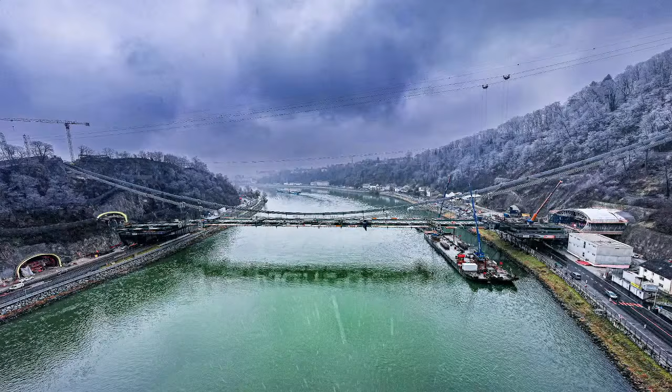Sometimes it's not the material of the structure itself, but the material you build in. Here, this is a bridge we have just recently finished in Austria, crossing the Danube River, where the foundations were the problem, the rock was the problem. Here, actually, it was not a problem. We could finally do a bridge we have always wanted to do, a suspension bridge without masts, where the cables are directly anchored into the mountains. That you can only do if the material of the foundations is good, if you can anchor heavy loads in the soil. Or this is a design for a beautiful, transparent, lightweight arch bridge in Switzerland.

And Switzerland is concrete country, but this is a steel bridge. So sometimes you can switch even customs and traditions if you come up with a convincing design. And here, in this case, steel was the better solution. It's in the city of Chur, and in September there will be an international footbridge conference there in this city.

And here, perhaps you know where this is. That's Tirumala. About 9 years ago, I was at IIT Madras, gave a course with Professor Devdas Menon. I think it was in 2016, and we did a workshop on bridge design with the students. So the idea was to design a footbridge for Tirumala, and later we made a concept study for a bridge to protect the pedestrians because they had to walk on the road. I'm not sure what happened to this bridge. Let's talk about this later.

Anyways, just to give you some ideas, but our real roots, one of the roots of our office, is actually in India. Perhaps you know this bridge. I've been talking about this sometimes. This is the second Hooghly Bridge in Kolkata, the Vidyasagar Setu, that was designed in the 80s, and at that time it was the longest cable-stayed bridge in the world.

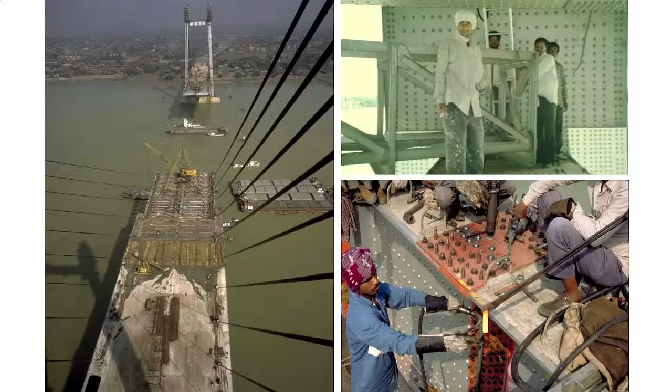It took a long time to build it. By the time it was built, it was not the longest anymore, but it was the first cable-stayed bridge with a composite deck. And it showed the power of composite sections, and it was built with local material, indigenously, because at that time there was not really weldable steel in Kolkata. There was not a lot of experience with high-strength friction grip bolts, but yes, there was experience with riveting. So the entire bridge was built. It's a world record long-span composite deck cable-stayed bridge, and all riveted. So this is possible with local people, local workforce, local material, and local construction methods.

Is there a pointer here? I don't know how the pointer works here. But anyways, you can see it. No, I wanted the pointer, that I can. No, don't worry. Let me go back. Here we were.

Anyway, so this is local materials and riveting. So I think we as engineers have to be flexible and find out what is available and what can be done. And riveting is actually a very good way of connecting steel, even though today it's perhaps too expensive. So the bridge is still standing, and it shows how slender cable-stayed bridges can be, how resource saving they can be. It's a 450-meter deck with only a 1.50 meter height.

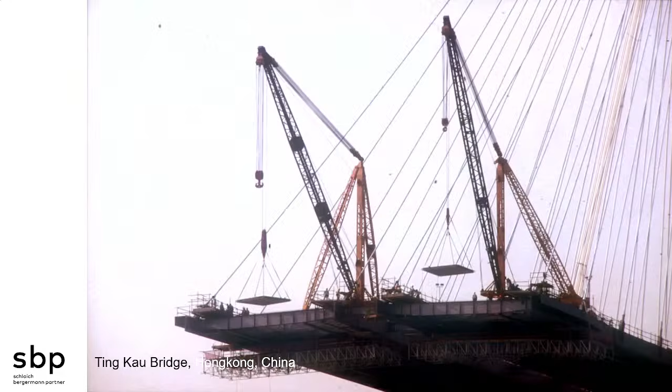This bridge again is done with the composite deck. It's one of the few multi-span cable-stayed bridges, with a 450 meter span and about 1.50 meter deck height. The difference to the bridge we have seen before is that here we have worked with precast concrete slabs. You see a steel grid, and on the steel grid there's a concrete slab. I think this is a very fast way of building such bridges, because the steel grids are comparatively light. They can be prefabricated and put on site very quickly.

Then you have the sheltering concrete slab that protects the steelwork and takes the horizontal cable forces very nicely. But if you work with in situ concrete, these horizontal cable forces on the young concrete cause a lot of creep, and this creep overloads the steel very easily. So for the next bridge we chose prefabricated concrete panels, because they're older, so there's less creep and less loading on the steel.

So this is the example of the Hong Kong bridge, the Ting Kau Bridge, and because it's a multi-span bridge, you can see you have to stabilize the main pylon. Therefore there are these longitudinal stabilizing cables, because the central mast has no backstays, and usually cable-stayed bridges do have these backstays and they need them.

Then this story continues. We came back to India. Perhaps you know this bridge, the Signature Bridge in New Delhi, which is a signature bridge because at the time the chief minister, Mrs. Sheila Dikshit, wanted an icon, a signature bridge. When I hear this word, I get goosebumps, because usually I'm trained to do good bridges, not to do crazy stuff, and signature always sounds a bit like crazy stuff.

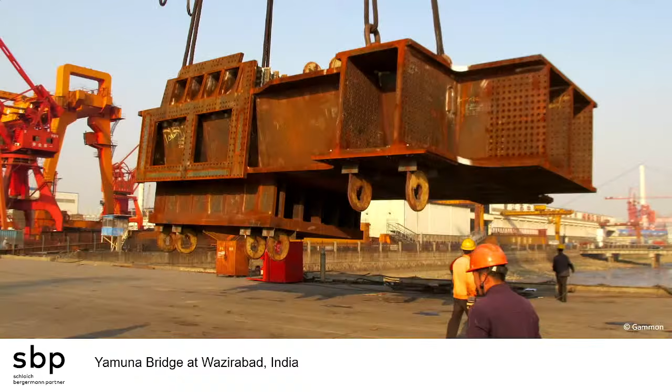I'll give you one example of what that means. If we look at just the connection where the mast meets the deck, this is a rather big element that needed to be prefabricated, meaning you have to move 400 tons of steel half around the globe. This was prefabricated around Shanghai, plates welded together, and then you see the little holes bolted to longitudinal and transverse girders. It had to be coated, and they had to bring it all the way from Shanghai to New Delhi.

And you see this plate here, a 250 millimeter plate. We thought that was not possible. We had designed it with lots of 50 millimeter plates, but the Chinese said no problem, we can weld 250 millimeter steel plates. So the choice of material has also got to do with the dimension of the materials.

What can you actually do? What can you weld? What can you connect? What can you transport? This is just this little piece here, and the entire bridge was then built together like that. Because think, if you see such a mast, such a pylon, how would you construct it? What's the structural detail behind it? Is this hollow with load-bearing outer walls, or is there a structure inside? If you look at the Statue of Liberty, that was actually designed by Eiffel, of the Eiffel Tower.

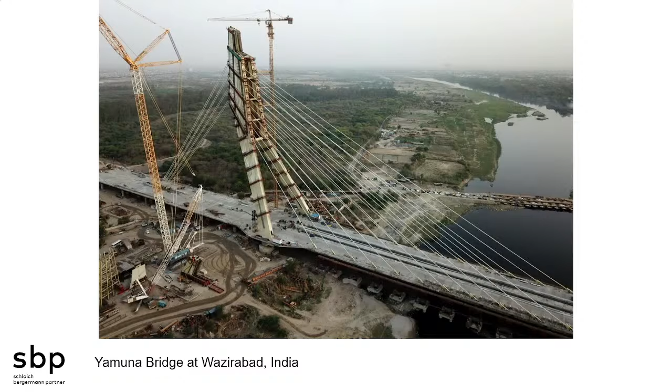And then you see these horizontal lines, or almost horizontal lines. This is where individual elements were connected. It's basically a big Lego thing. Large elements were bolted together. You see the last one on top. So this would be the size of one of these elements.

So the bridge is standing nicely, fulfilling its task as far as traffic goes. But it's a bit strange, why have a 250 meter single-pylon cable-stayed bridge in an area where there's no water really? Because this is basically a 500 meter bridge if it had two masts. The initial idea was that all this would somehow be dammed, that there was a huge lake, and that would become a big park with a lake. So they call it the signature bridge, and whenever I'm in New Delhi I say, yes, but the signature was the promise to make a park, and you have not really fulfilled your promise yet, because this bridge only makes sense if there's a lake and a big park. I really hope that one day this bridge will get its lake and make sense.

But it's a nice composite deck, and it really relieves traffic in New Delhi. Not all bridges need to be composite decks, obviously.

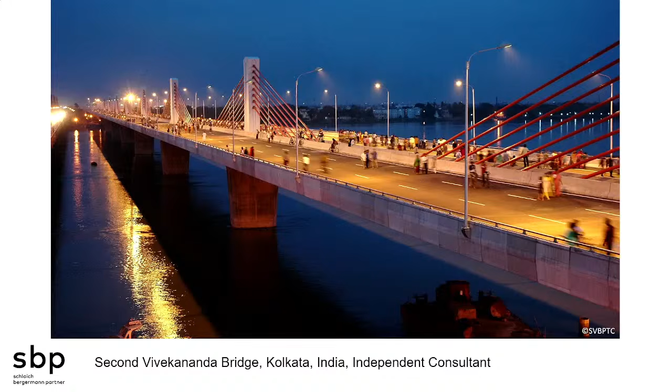And here, this is an example of an all-concrete bridge, the multi-span extradosed bridge, the second Vivekananda bridge in Kolkata, designed by Parsons and IBT, together with CES, built by L&T, all these abbreviations.

I found it very interesting to understand how extradosed bridges work, because I come from the field of cable-stayed bridges, and if you see such a bridge as a cable-stayed guy, you say that makes no sense at all. These very low pylons, these very inclined cables, the forces in the cables are way too high. Why make such a high deck if you could make it as slender as we've seen before? The backstays are missing, this is all crazy, it makes no sense.

But they are not cable-stayed bridges, and this is why they do make sense for spans between, say, 100 and 200 meters. Basically they are only box girder bridges where the pre-tensioning or post-tensioning has somehow grown out at the supports. And since the cables are very shallow and the masts very low, they work mainly to carry dead load. Also, because there's no backstays, the masts are comparatively flexible, and since the deck is very heavy, the deck is basically taking all the live load.

So these cables you see are mainly for dead load, basically nothing but post-tensioning, so the load-bearing behavior is completely different. Since they are mainly for dead load and don't get big stress changes because of live load, there's less fatigue problems. And if there's less fatigue, you can use cheaper steel and cheaper anchorages. Therefore extradosed bridges are very attractive, very economic for smaller spans.

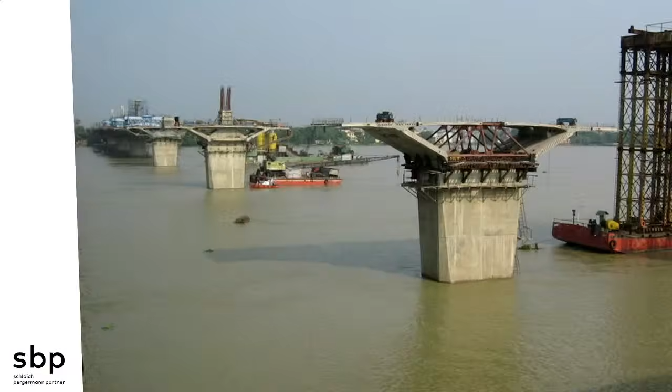So this is what I learned on site. We were the independent consultants, and I learned so much about extradosed bridges, especially in India with all these well foundations. Well foundations are another very Indian thing. You have these big rivers, the scour and the sand, and that all calls for these well and caisson foundations that you wouldn't use so often in other parts of the world.

So the well foundations cannot be seen, they are down here, up to 50 meters. Then you have this concrete pier, and you see the first segment still in steel, again composite, steel and concrete. And then back there you see it's all cast with concrete, all monolithic. So this is already an example of an integral bridge without bearings and joints, at least at the piers.

And this is one of the segments, D6 segments, D6 because it's 6 lanes. There's all kinds of shear keys to connect the deck segments. Here you see this hole where the cables are installed.

So very typical, and something that you would not build in Germany, for example. In Germany, such bridges are not allowed because in Germany people say in these joints there's trouble. We have a lot of de-icing salt in Germany, and the salt water runs into the joints, and then you get corrosion in the pre-stressing. So in Germany it would be very hard to build such a bridge, while in other parts of the world you see them all the time.

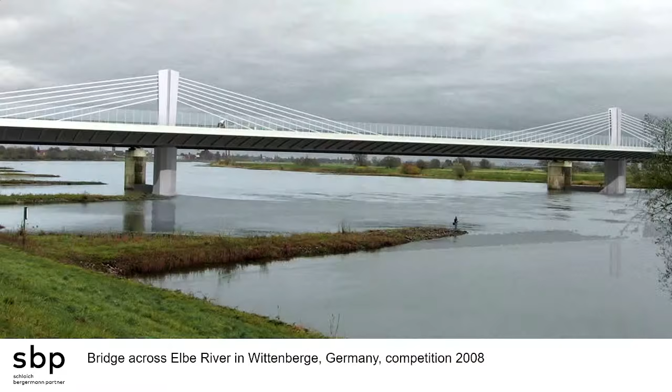Extradosed bridges are also something quite Indian. There's a lot of extradosed bridges here in India, while in Germany there's not so many yet. This was one proposal that we did for a German Autobahn highway, but did not get built. Still, we got all the extradosed guys in the world, the ones that I know at least together. There's Mr. Sankaralingam, whom you perhaps know from L&T, and at IABSE we wrote one of these IABSE books on extradosed bridges.

So we collected all the knowledge, that international knowledge that is available in this book. Thank you very much.

So we have talked about cable stayed bridges and extradosed bridges and a little bit about the differences, but this doesn't necessarily have to be a steel cable. It can also be a steel plate. So this is a railway bridge in Stuttgart, Germany, that follows the same principle. You can call it an extradosed bridge, but rather than having expensive cables, it's just heavy steel plates that at the same time form a bit of acoustic protection.

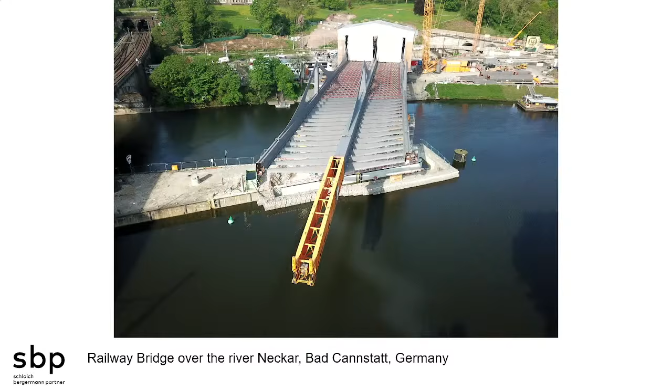And this bridge was just recently finished. It's again a composite deck. You see the tent back there. This is where the deck was prepared, pre-welded, and then it was pushed segment-wise across the river. And you see the longitudinal girders and the cross girders. And then the concrete was cast on top.

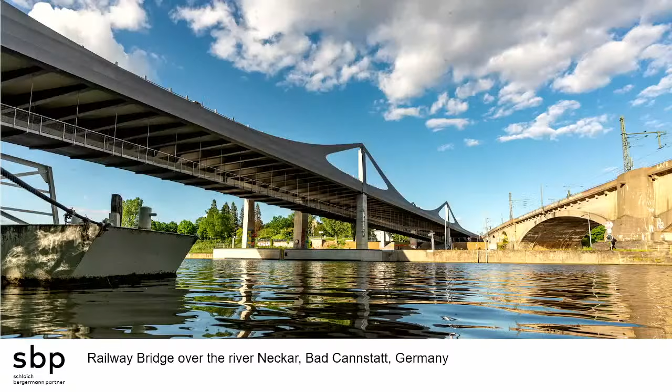So even railroad bridges can be done this way. And underneath the deck, you see this hanging footbridge. So at the same time, it is kind of a protective structure, protecting the pedestrians that at the same time cross the river Neckar in Germany.

This was the first part. How much time do I have left? You have about 10 minutes. 10 minutes, okay, then I have to speed up a little bit.

So integral bridges. In Germany, usually you do bridges with lots of joints and lots of bearings, and already my father, whom you have met in the beginning, said, look, why not make integral bridges with very slender decks and very small spans. The smaller the span, the lower the loads. You can do it with very slender piers. And this is what we have actually designed for German railways.

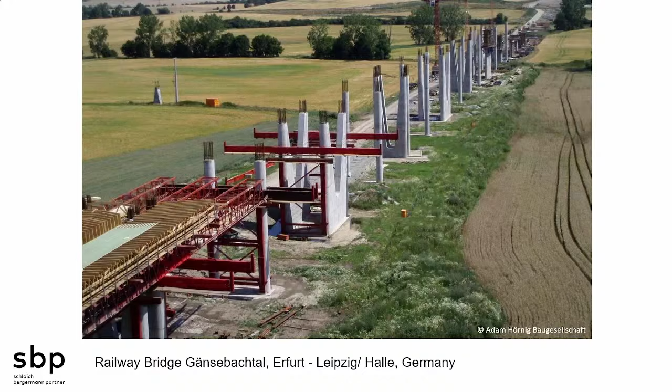German railways is rather conservative, but they have accepted integral bridges. So here you see very slender piers, very slender support structures with the starter reinforcement, and everything was concreted together as an integral bridge. So no bearings, no joints, or very few joints, and that is, I think, a very elegant way of building robust and low maintenance bridges all over the world.

But if you define well the concrete, and in this case you have to define not only the strength but really the modulus of elasticity, then you can do very lightweight, very elegant, very resource efficient structures that last for a long time.

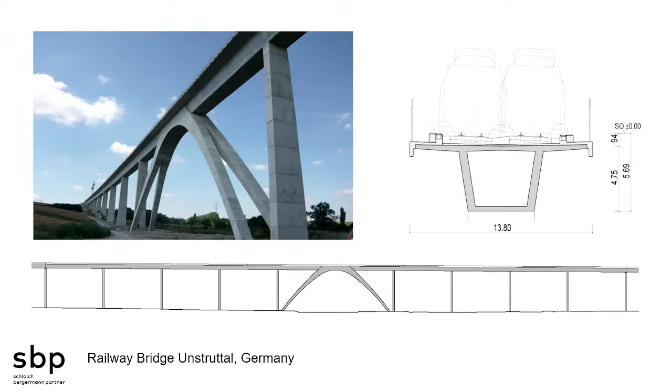But in this case, yes, the movement goes all the way into the ground, so you have to also do pile-soil interaction. Calculation becomes very important. And this is also my claim: you have to spend a lot of brain as engineer, and the contractor and the client are the ones who save money, so they should pay us well. If you don't pay your engineer good fees, he has no time to do stuff like that. So I think it's very important that contractors and clients understand that.

So this is the bridge, and you see even at the joint, there is no bearings, because there's two walls on the mast, on the pier, and these walls are monolithically connected to the deck.

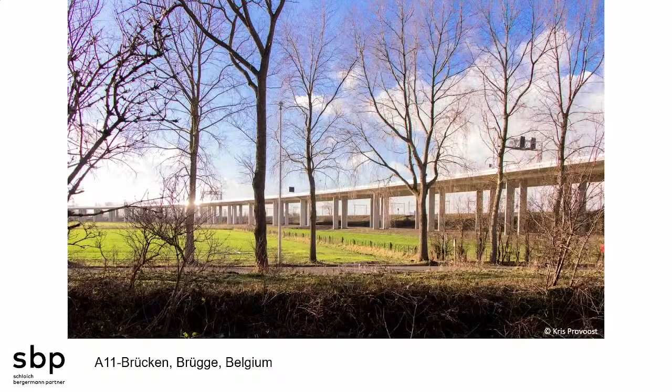We applied the same system to highway bridges, and you can see that it's a very humble highway bridge, but still small spans, only 1.20 meters height, and very slender piers of high strength concrete that can take care of all the movement. So this is a 600 to 700 meter integral bridge without any bearings, any joints, and they are very cost efficient, because there's no expensive bearings and no expensive joints.

But yes, you have to sometimes construct the piers and stress them to the side, then cast the concrete, and then with time they go straight due to creep and shrinkage. You have to do some fancy construction acrobatics sometimes if you really want to do it successfully. So you see how slender these piers are for a rather normal bridge, but the contractor saved a lot of money and the world saved a lot of resources.

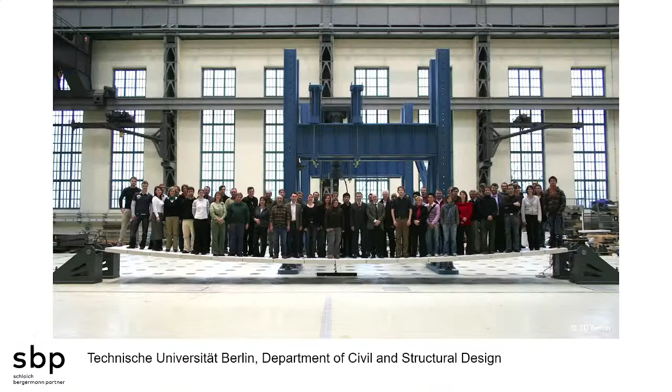So I have about 5 minutes left.

Okay, now we go into the field of carbon fiber. Perhaps we can discuss this later, because these bridges are pre-stressed with steel, and we have started to work with carbon fiber. This is perhaps the first carbon fiber stress-ribbon bridge in the world, about 15-meter cable, stress-ribbon bridge with only 1 millimeter structural height. Very slender, because carbon fiber does not corrode, no fatigue, and very lightweight.

So I had several PhD students working in the field of carbon fiber cables. We have developed anchorages for carbon fibers. I could talk for hours, but this is not the time right now. I just tell you, don't break them. Make sure that this brittle material doesn't break, because you end up with a lot of fibers and a lot of powder, black powder, after a big bang.

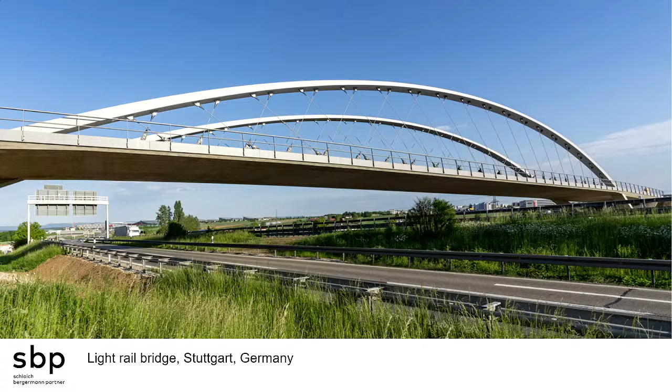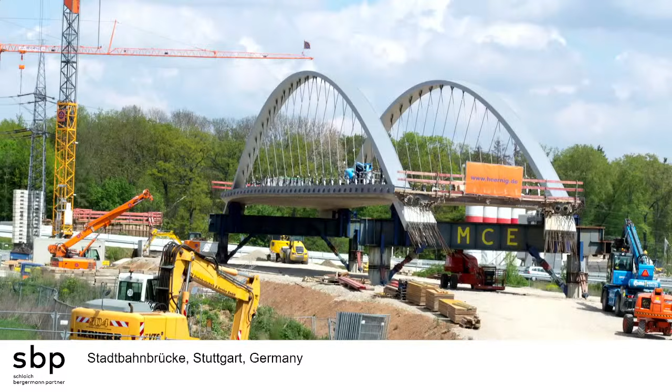But this research has led to bridges like that. This is a network arch bridge where you get a lot of stress changes due to live load, and if you would make the hangers in steel, they would have big diameters because of fatigue design, while with carbon fiber you can end up with very slender hangers, as you can see here. The entire bridge was prefabricated. This is the carbon fiber anchorages, and here you can see how slender these hangers are in carbon fiber.

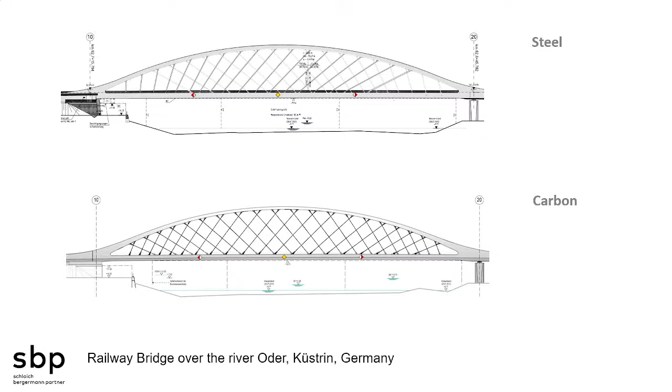There's another bridge I quickly want to show you. This is the Oder, a river between Germany and Poland, and German railways again allowed the change from the heavy steel hangers to the lightweight carbon fiber hangers because it meant lots of savings for them. So this is another railway bridge where the bridge is pushed in and eventually goes 120 meters across this river. You see how slender the hangers are.

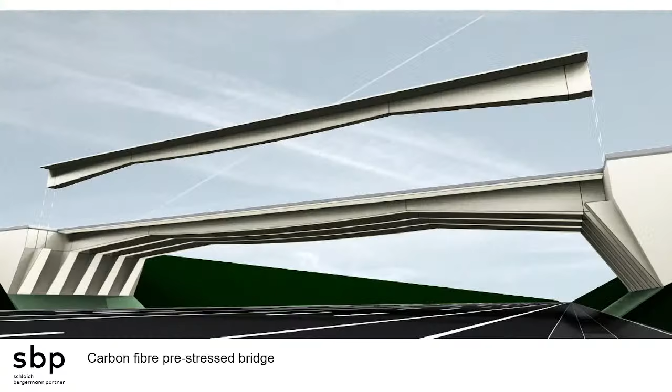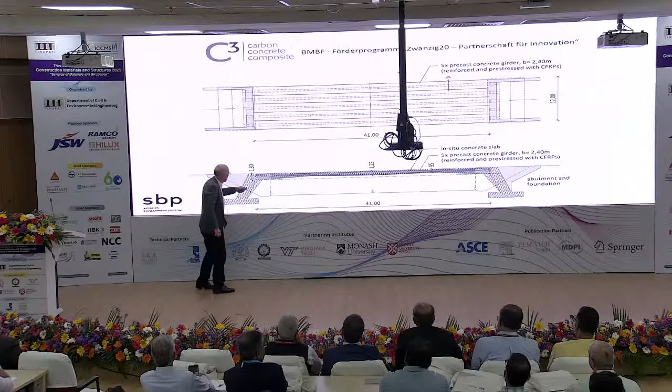We have developed now pre-stressing systems for concrete girders. So we want to do bridges that consist of individual carbon fiber pre-stressed girders that are cast into the abutment. And we have done tests now. This is a 1:2 scaled example of such a precast girder cast into the abutment. So you have no joints, no bearings. You end up with an integral bridge.

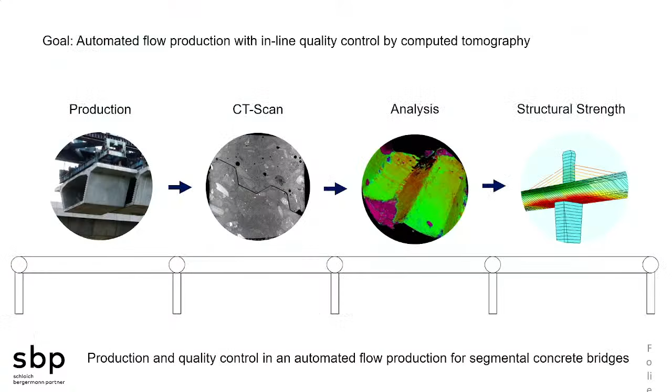And we have loaded it very heavily, as you can see here. Then with a shaker on top, we did 2 million cycles, and we found out there is no fatigue issues in carbon fiber. And we are now trying to do this with small elements. We do computer tomography to see what the joints say to that. If you do computer tomography, you see all the little cracks in the concrete. We can check the surface and how the surfaces are connected.

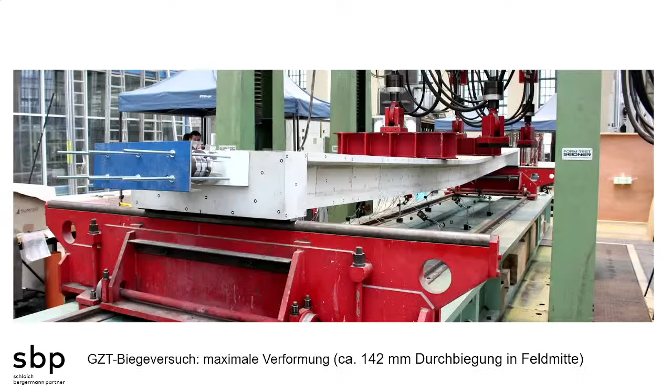And we've actually built a small test bridge. You see these small precast elements, and they're stressed together with carbon fiber. We could prove that these carbon fiber pre-stressed bridges work very well. You see the carbon fiber strands here, pre-stressed together with lots of little elements.

So this was a quick run through the world of composite decks, integral bridges, carbon fiber, India, Germany. I hope this entertained you a little bit and inspired you to think about materials and structures. Thank you very much.

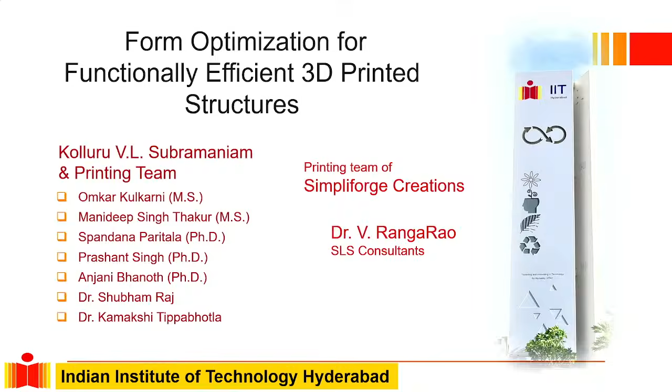With this, I just want to quickly touch upon what 3D concrete printing is and the niche we hope to fill. First thing is, the current form of construction we have is slow, and it by itself requires forming—you need to construct shuttering, assemble it, pour your concrete, and slowly it takes shape. Now, forming on site can be an advantage but it's also a disadvantage because I'm limited to rectilinear shapes, which are not the best or most efficient shapes possible.

What are you doing? You're packing a lot of weight, and to support that weight, you need more weight. So you work down a negative spiral, where if you look at fundamental concepts of design—the way we design a beam, usually rectangular, as we're taught in reinforced concrete—we assess the demand. Usually most of the demand, particularly with larger spans, comes from the self-weight itself. We try to balance it with internal moment of resistance generated by the material, or a combination of materials, steel and concrete.

And if the material resistance is not adequate, what do we do? We make the beam deeper. In doing so, we add more weight, which adds more demand, and we go down a negative spiral. Most of you who have done reinforced concrete design know that beyond a certain span length, you cannot do a singly reinforced concrete beam—you just cannot, because you go down in a negative spiral. It's like a dog chasing its own tail. So now, can we do something about this?

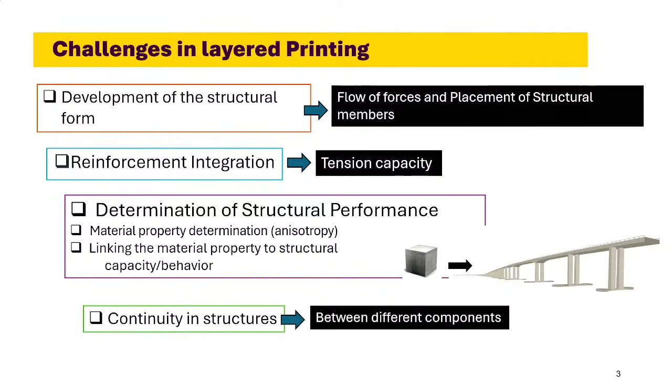And continuity in the structures. When you're talking about concrete structures or steel structures for that matter, continuity, the flow of forces, transfer of stresses is very, very important. So we have to visualize the flow of forces, the stress paths, and make sure the material is adequate to withstand the stresses.

So we started with this, and we wanted to demonstrate this process of form optimization, and we chose a bridge for our purpose. The whole point was to demonstrate this form-specific structural system optimization for this specific case of a bridge.

The idea was very simple: that we were going to design and print a bridge of 7.5 meters. That was the design purpose. Go through the whole process of this form optimization, come out with a structural form, and actually design the bridge, test it also. We've tested some prototype bridge, and then finally install this bridge.

That is the bridge that is installed on our campus. It is designed as a pedestrian bridge. Although when we tested for load capacity, it has significantly higher load capacity. It could very well pass. It could certainly take the traffic, regular traffic, for a 7.5 meter bridge.

So now, when it comes to developing the printing of the bridge, we have to assemble. We are looking at filaments. So basically, what comes out of the printer is a filament - an extruded filament of concrete that you deposit and create a contour. And that contour, you assemble several contours in multiple layers, and you create a structure. So that's how the structure is built.

Now, the first thing we had to do was develop the material that would basically withstand the rigors of printing. Now, I will not get into details of that, particularly dealing with printability, buildability. There's a lot of material processing that happens, development of the material itself that makes a material suitable for printing. I'll not talk about that here.

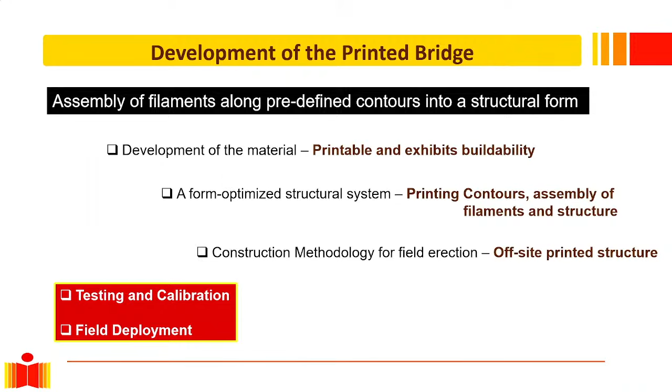The printing system itself is a custom engineered printing system that we developed. It's different from most other commercially available systems in the sense that it's a direct deposition system. We have a custom engineered pressure control pump with a PLC controller which allows us to control the output at the pump. We do not have an additional compactor that's available in most printing systems. The material directly flows from the pump to the nozzle.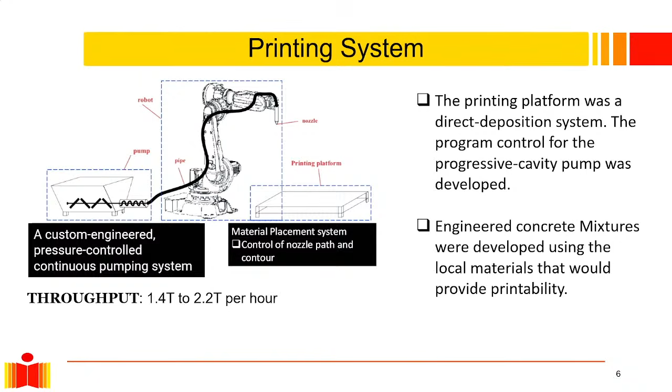The robot itself is a commercial make, an ABB robotic arm, and it helps position the material and deposit it along the contour. So this is the system we have developed, and with this we are able to print concrete with about 6 millimeter sized aggregate, which I know for those working in concrete perhaps seems not significant, but in the printing community that's considered still pretty much the cutting edge.

Now this gets us out of our comfort zone because everything we do with concrete design, we treat as an isotropic homogeneous material, which basically means the material behaves the same in all directions and at all locations. That's not true here. You have these layers separated by interfaces, which creates anisotropy, and that is reflected in the material properties. Now, if I was to design with this, which material property do I use?

So, being good engineers, here's what we did. We chose the weakest direction, direction 2, and then applied 1.65 times the standard deviation, moving away from there to define a characteristic strength that comes out to 30 MPa. We thought we can't go wrong. So that's the compressive strength of our printed filaments, and that's what we are going to use and proceed with our design.

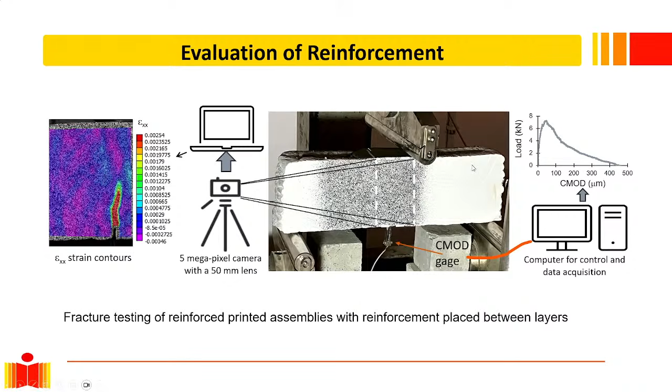There's nothing special done to bond the steel to the filaments, and the bond develops as the concrete hardens. So we wanted to see how effective this is, and we did some fracture tests on beams printed with the steel placed between two layers. Here you can see there's a notch, and the steel was placed at this level. We did the fracture test, and from it we basically extracted the results.

This is the load response that you get - not very encouraging, but there is still something we can salvage from here. If you look at the load response of this beam tested in fracture, load builds up to a high value, a crack forms, you can see the progression of the crack, and then steel eventually does catch up and starts giving a response. Mind you, this is just a 3 millimeter steel wire simply placed between the two layers, and I'm able to get some residual force transfer from this concrete just by placing the steel between the layers. We can actually do some fracture analysis, and from here we can extract what is called the cohesive stress.

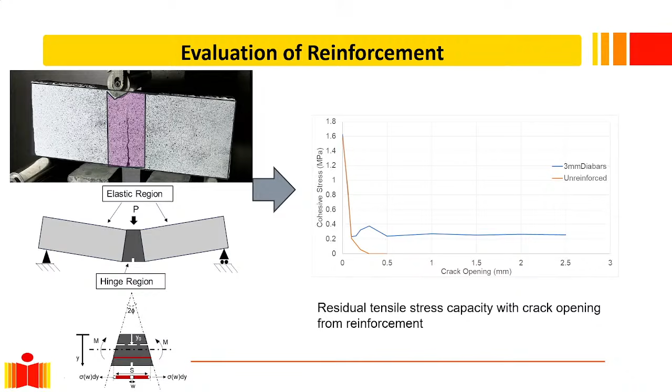I'll show you that while it doesn't seem very significant, it actually plays a big role if you get the system, the configuration, correct. So the next thing is development of the structural form.

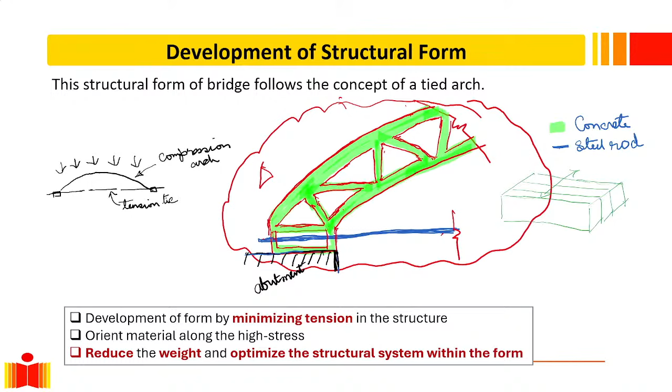The filaments are being placed along those green lines, and as the printer runs along, the filament is deposited in the strongest direction—the strongest direction of the material is the direction in which it's extruded. So by default, the strongest direction of the material is oriented along where the stress is going to be highest. But we wanted to develop this further, and for this tied arch we were relying on stress-based development of geometry.

If you take a beam and apply a uniform distributed load, you'd see from the stress contours that a compression arch forms on the top. Basically the entire compression goes to the top, carried by compression, and the bottom part of the beam would be in tension, which you can remove—and that's where you put a tension tie.

Our whole concept was to look at the compression form, which is what we get from a stress analysis. This would be the concrete part, and we'd rely on steel to take the tension. It could be steel, or I could even put abutments to simply transfer the thrust onto them, because all I need is something that takes care of the lateral thrust.

So we went about developing the structural form using the truss design from the stress trajectory. You do a stress analysis, identify all the stress trajectories—the compression form comes out as the outer boundary, the top surface and side surfaces, and the bottom parabola is what you get from the compression stress trajectories.

Once you get the compression form, you can develop the structural system—a lattice grid of members inside that compression form—using the Mitchell truss theory. What you do is look at the continuous stress field and replace it with these lattice members, creating a structural system within the compression form.

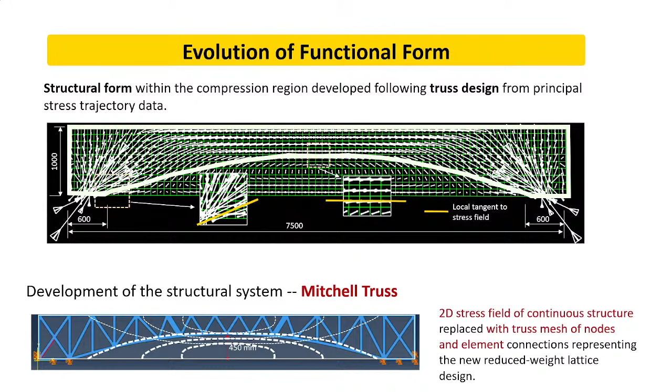That is the process we followed. This is the first cut of a structural system we developed within that compression form—you have the top chord, the compression arch, and the two sides, and we've created a lattice inside there. When you do the analysis of this lattice, shown on the bottom, you see the diagonal members alternate in compression and tension. That's expected with a lattice of diagonal members placed within the compression arch. Now the top chord actually does see some flexure.

There is some bending that happens there, so these are things we need to worry about when doing this. Of course, the strongest direction of the material is oriented along the members, the filaments that form the structure. One problem with this particular geometry is that we have these 4-member and 5-member intersections, and when printing concrete, in one layer you want a continuous print path. When you have these 5-member intersections or members crossing each other, you do not get a continuous print path.

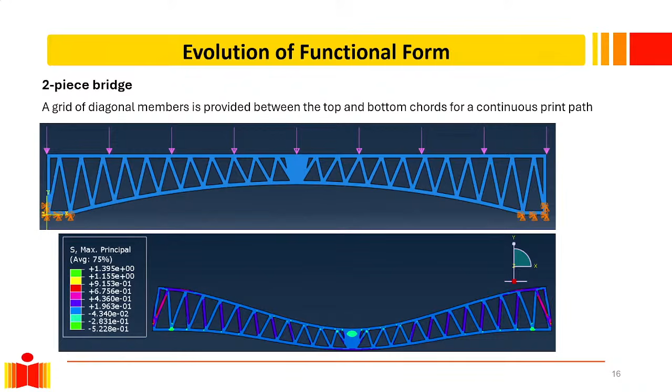We did the analysis, and from here, the next thing—if you look at the structural member here, I have the arrangement of the diagonal members within the compression form, and the height of the arch. So I can play with the height of the arch. When I increase the height of the arch, I actually see the stresses go down in the members.

If you look at this as a structural problem, what I have is a geometry I'm trying to optimize. The compression form is given by the stress trajectories. The top chord is fixed, the side face is fixed, the bottom arch comes from the stress trajectory, that part is fixed. Then I have these structural members, the lattice, which I can play with—increasing or decreasing the spacing of the nodes to create different structural forms within this compression form. The other freedom I have is to play with the height of the arch, increasing or decreasing it.

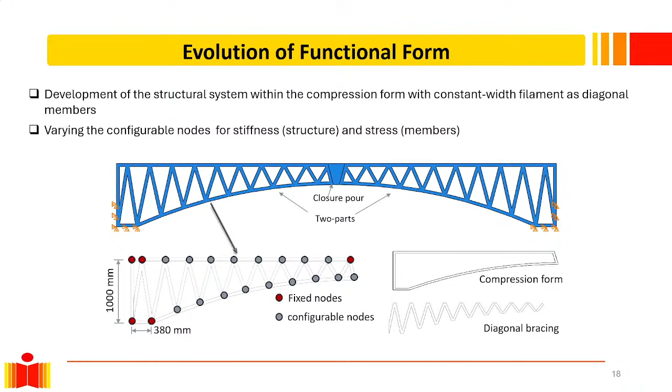So we did this process iteratively, went through several iterations, and ended up with the final configuration you see at the bottom here. The constraints were stress in the members, primarily tensile stress—minimize the tensile stress in the member, and minimize the deflection in the structure. We were able to cut down the deflection, and significantly the self-weight of the structure contributes to the overall deflection, so when I take away material, I'm actually helping the structure by reducing the demands, which in turn reduces the stresses in the members. This is the final configuration we settled on, which gave us the best performance in terms of deflection and stress.

Now from here, the next step was to actually print a prototype bridge and test it. The prototype bridge—we couldn't do the full 7.5 meters, so it's a scaled down version, shrunk to a smaller 5.5 meter span. But when you shrink it, your print filament thickness still remains the same, so it's not exactly scaling, because the filament thickness is always fixed when I print it.

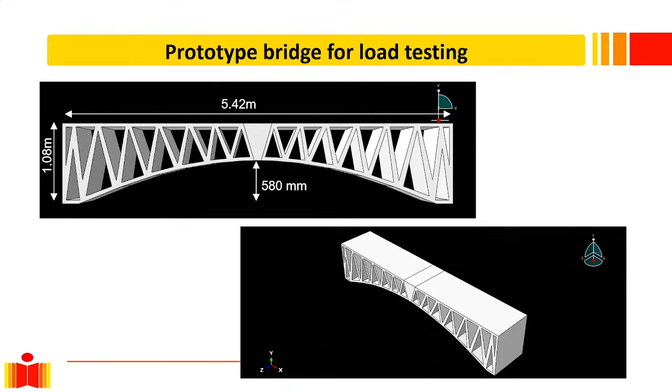We printed this prototype bridge, it was installed, and we load tested it. The idea of this load testing was to calibrate our numerical model. When we looked at what we were predicting, we were pretty close to the deflections we were able to get within the linear part of the load response.

By then we were already hitting serious loads of about 40-50 kilonewtons, and when we started loading beyond that, the response was still linear. But my students didn't allow me to load the bridge further—they did not want to damage it. They got really attached to the bridge, so we had to leave it at a certain point. I said linear calibration is good enough, so my model effectively works from there.

Now the next thing is to actually print the 7.5 meter bridge. We reinforced it using the same wire—this is the reinforcement template. Again, just doing what is expedient: simply take a wire, bend it in this shape, it's a continuous filament, and every 8 layers we would lower one of these steel wire templates onto the print—a continuous run of steel placed between two filaments.

And we already have the tensile response, the cohesive response that we got from the fracture test. So I do get some residual tension resistance from this steel template.

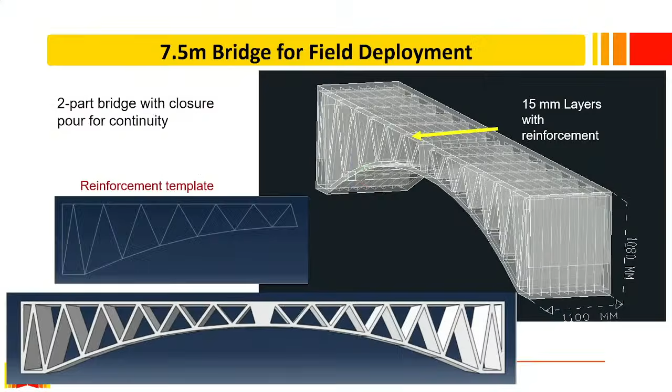Next was to simulate the response, predicting it using nonlinear finite elements with concrete damage plasticity. A proper model was built, with the idea of predicting the load capacity, how much this bridge could possibly take. Here we're cheating a little bit because we've only done the linear calibration, but we're pushing our simulations to see what load the bridge could actually take.

So here is the load response that we got, that's the curve in blue. We see that it actually goes to a pretty high stress, the pressure that can be applied. It goes to about 64 kilopascals or so, that is the pressure that can be reached before serious damage starts to happen.

Now if you look at the damage in the bridge, you see that most of it is tensile. Basically the tensile members, the diagonal members, crack first, and that little bit of residual stress that the wire is able to provide redistributes the forces within the lattice.

So you don't need a whole lot of tensile capacity to redistribute forces within the structure, and that's what happened. Point 1 is where the first crack happened, and after the cracking, the steel takes the tension. The residual stress is small but it still takes it, and because of that there's a redistribution of stress within the entire lattice structure, allowing the load to build up to a significantly high value.

So while the first cracking happened at 30, it essentially failed at almost double that load. And while it went from point 1 to point 3, there was a lot more cracking, a lot more diagonal members cracked, with a little bit of residual stress that the tension wire was providing.

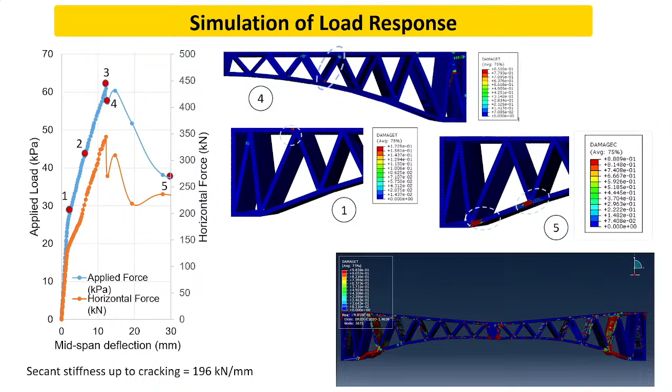The final failure happens because of the compressive strut. When one of the members loaded in compression fails, the structure goes. So that gives us reassurance that even with a little bit of tension reinforcement, for a structure that's optimized with concrete in compression, I can actually design structures that can take a significant amount of load.

Just to show you the sequence of damage, here is the tensile cracking at different points in the load response. And the final failure is because of compression damage in the strut.

This is the final bridge that was installed. It is offsite printed, two segments with a closure pour.

This bridge has been designed as per standards as a pedestrian bridge, but of course our load analysis reveals that we could actually carry significant traffic loading if we had to.

The few places we kind of cheated: we don't know the fatigue response, and that becomes very critical, particularly for bridges. So we did what the code allows us to do, using a lower allowable stress in our design. And remember, the compressive strength I'm using is already a low value, the lowest compressive strength of all three directions, while I'm loading the material in the strongest direction. So there's already an inherent factor of safety built in there, and on top of that, we took further reductions.

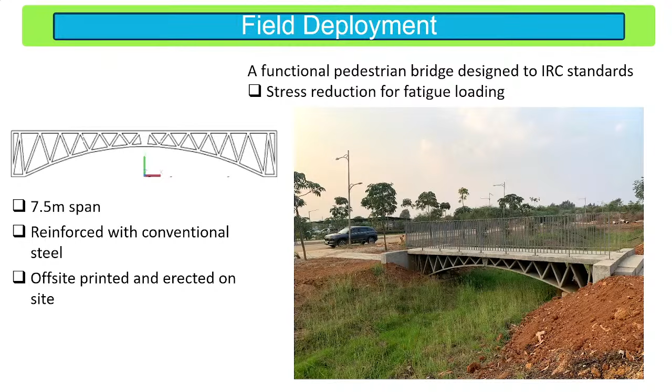So a quick review of lessons we learned from here. Basically, we can look at structural forms and 3D geometry for structural efficiency, and use printing to deliver those forms, optimized within a compression form. Use concrete where it is strong and develop a form within there. I don't need a full rectangle to give you the full capacity, I can do with less, and that's the whole point of this.

We are doing what's called form optimization and not topology optimization, because if I had turned it into a topology optimization exercise, that would be a glorious mathematical exercise, but I would end up with member sizes that are not uniform, all different sizes. But when I'm extruding, my extruded filament is always of a constant width. So this is one of the lessons we got from here.

Lessons specific to the project: the mechanistic understanding of the system response is still not there with us.

I still am not comfortable with the prediction that I'm making about the capacity. While I boldly go around saying the capacity is this, I really don't have much besides a simulated response.

The continuity between the elements needs study. If you look at the printed form versus the physical form, the top chord and the diagonal member are basically two separate members, but in the digital representation, it's shown as a continuous joint, and that's how it's modeled even in our finite elements.

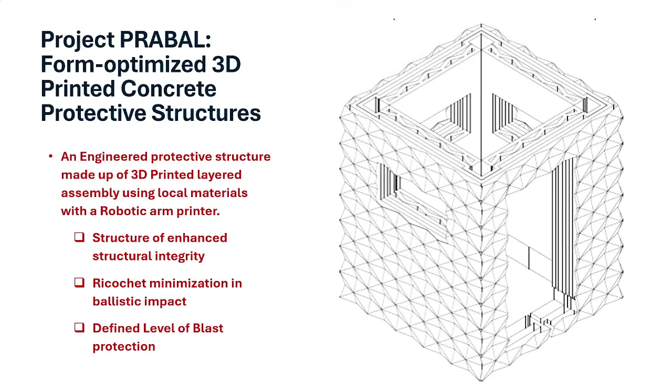This is a protective structure that was printed on-site. The surface features you see are engineered to give a high level of ballistic protection, and the shape itself has been optimized for a very high level of blast protection. This is the bunker that was on-site printed.

We're taking this further for geometry-based optimization for developing subterranean protective structures, where we come up with this eggshell-shaped geometry. Basically, the entire structure goes into compression.

I can deliver this geometry by printing and use minimal amount of material while giving very high resistance to blast, or even to overloads or surcharge coming from traffic.

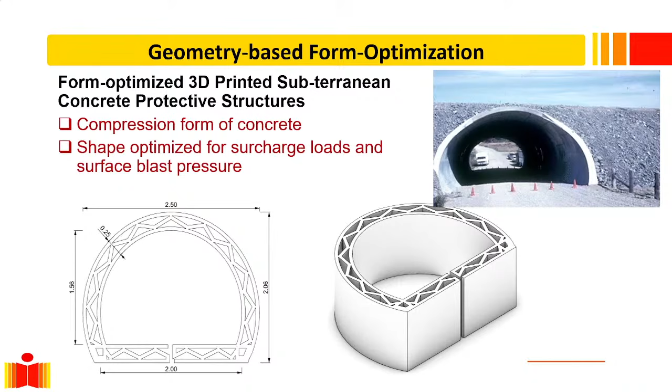So these are the kind of structures we're looking at, where I can use 3D concrete printing to deliver shapes that aren't possible by regular construction or casting, using the material to its advantage in a form-optimized manner. With that, I'd like to thank you for your attention.

I know Venkatesh is getting a little anxious, so we'll be happy to take questions.

Thank you, Professor, for your excellent presentation, this is very timely research.

A couple of practical questions from problems I faced with 3D printed recycled plastic composite with fiber along with that. If you see the physical form with the chord and the web for the truss, there is a bonding problem between the web and the chord. You test with a small amount of load which might not create shear there, but...

When you do the finite element analysis and go beyond the particular elastic limit, shear failure could occur. Even for earthquake or any lateral loading, this area is really problematic. For my industry project, I'm really struggling to fix that, and still continuing to work on the bonding between different segments, because during printing it takes time. We're not simultaneously printing all the chord at the same time, so some part is curing while coming back, and bonding issues are always there. So how might we solve this issue?

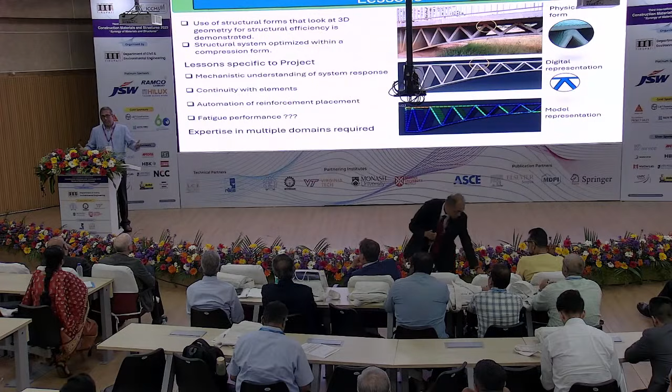That's actually a very good question, because the material we use for printing is almost two times more expensive than regular concrete. It's a cement-rich binder, so it is more expensive. My savings are not going to show unless I show savings in the structural form. So for that, I have to design an equivalent concrete bridge of 7.5 meters span and show that I'm able to save material, and I have to save enough material to overcome the cost differential. We have done that exercise, and we find that net we save about 40% cost, including the enhanced cost of the material. The bridge is actually only 22% of the area of the rectangle, as opposed to a solid rectangle. So there's substantial savings in material that overcomes the increased cost of the material itself.

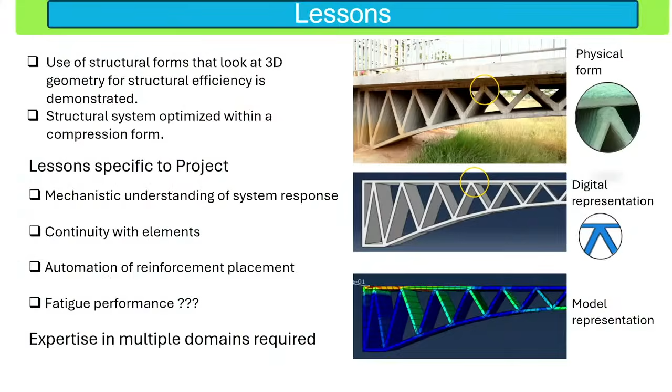Thank you, Venkatesh. I had to come soon enough to stop Venkatesh from telling more. Do you have the collar mic? It's okay, it's okay. No, it's not showing up, it's not projecting yet. No, it's not projecting. It's not.

All right, so just enough, good morning. In two minutes I would have lost the good morning. Thank you for the invitation. Wonderfully well organized, and I should congratulate all the organizers for doing such a phenomenal job in taking care of all of us. So thank you for that first.

We had two beautiful bridge talks, so I'll slightly change topics and go into the smaller scale stuff that makes up bridges, and talk about the idea that we have been doing things in a certain fashion for all this time. Is there a way to change? Is there a need to change? I think that's a fairly straightforward argument that there is a need to change. I will look at whether there's a way to change, more sustainably, more economically, and effectively, in a way that helps development happen in a better fashion. So that's what I'm going to be talking about.

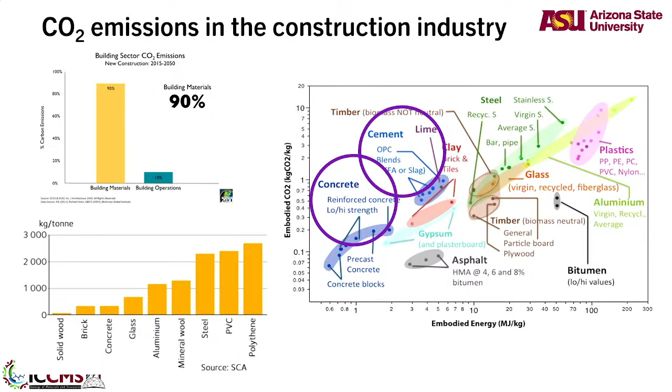I mean, if you look at cement, that's a little more, but if you go to all these other materials, plastics and aluminum and bitumen, they have much higher carbon or energy impacts, but then the volume of use is less. So again, there is a need in that sense to make concrete more carbon efficient if we still want to use the same amount or more amounts of concrete.

So cement production, again, I'm not going to go through it, I'm preaching to the choir. You have to extract raw materials. They have to go through a whole sequence of grinding, crushing, pyroprocessing, packaging, transporting, and it adds up with respect to carbon impact. But if you look at where the most impact comes from, that's in this manufacturing step.

Where you take limestone, you heat limestone to 900 degrees Celsius to make it calcium oxide, and then you fuse the calcium oxide with silica and alumina to form what you get as clinker, and then you grind the clinker to get cement. That process of calcination, where you heat the raw materials and then fuse with silica and alumina, that's where the highest amount of carbon impact and energy impacts are. Now, the first question is, chemistry is arresting us right there.

Calcium carbonate, to become calcium oxide, you have to take carbon dioxide out. There is no other way, right? You are stuck with chemistry there. Now, okay, then you say, I don't want calcium carbonate, I can use calcium silicate. You end up with another problem.

We don't have as much calcium silicates as calcium carbonates, and calcium silicate transformation to calcium oxide, to take the stable silica out, is an even bigger problem. You have to do other methods, not just heating. So now you end up with difficulty in processes, you end up having to have that extra CO2.

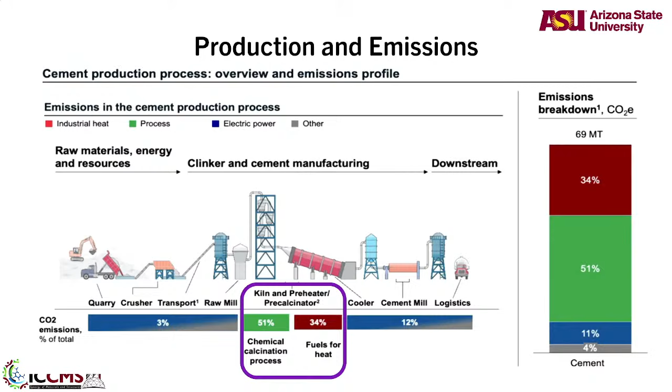So, and then again, that's a process that we talked about. But if you look at the emission impacts of concrete as a whole: cement, of course you do limestone and heat, you get clinker, plus you add SCMs, raw material, cement plus aggregate plus water. Somebody smartly put in air also, just to make sure that your voids are accounted for, so you're not complaining about the voids. And then you mix and you get concrete.

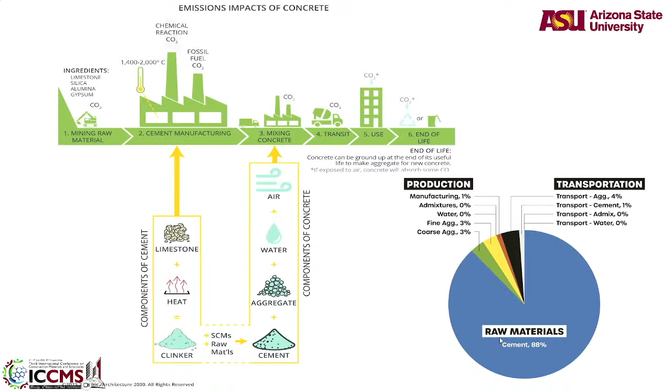But at the end of the day, 80 to 88% is attributed to cement, depending on who you talk to. So cement still is the biggest contributor to emissions and energy impact of concrete.

Cement is the cheapest material. I used to tell my students when I teach that you go to Lowe's, Home Depot, the big stores that sell cement and steel for home repair stuff, and you can actually get a bag of cement sometimes cheaper than a bag of potting soil. It's so cheap, and that's because of the scale at which we produce cement.

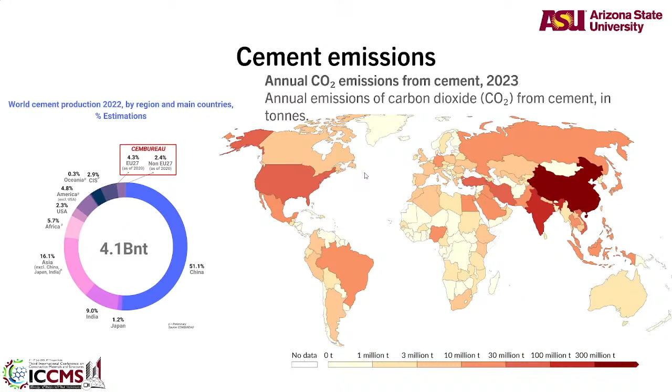Looking at emissions by different countries, you can see China is blood red because they're producing a lot of cement and doing a lot of emissions, so that number is coming down. India is not too far behind, US is not too far behind. Then you see gradation of colors - there's pretty much nothing here, but this will keep picking up. Canada, of course, not much construction there despite being a huge country. Australia, similar story.

So, life cycle emissions - cement manufacturing and aggregate production account for close to 80% of life cycle emissions of cement and concrete. That's a fact we have to live with. So the question is, how do we mitigate it?

This is from the US Department of Energy, typically a United States scenario. In India it's slightly different. But if you look at it, buildings constitute about 50% of cement consumption, and all other infrastructure constitutes the remaining 50%. In India, probably buildings are 70-75%, infrastructure is 20-25%. In the US, most cement production goes into infrastructure.

But again, the US produces only 100 million tons out of the 4.1 billion tons of cement produced globally - we are only 4% of global cement production or consumption, and most of it goes to infrastructure. Whereas in India, the scale is going up - India is probably at about 150 to 250 million tons now, projected to go further up. So the scales will tilt in developing economies pretty fast. Especially, as your director was talking about in the morning, 2047 Viksit Bharat - you need a lot of construction, a lot of infrastructure by 2047. This scale is going to tilt phenomenally, so the emissions will have to be curtailed.

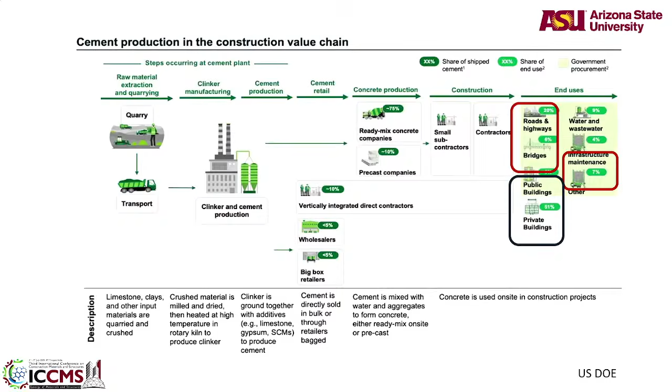So how do we mitigate? The first question asked, and the first answer you get from anybody who works with cement, is: use lots of waste materials, use SCMs, use less clinker, use all of these. Which is okay in a place like India where you have plenty of fly ash, plenty of SCMs.

In the US, we are pretty much out of fly ash. Really no fly ash is available, or very little, because coal power plants have been shut down. Maybe coal is coming back in the US in the name of 'clean coal' - we don't know what that is, but we are getting clean coal back. So maybe it'll turn, but right now we don't have coal, so we don't have fly ash.

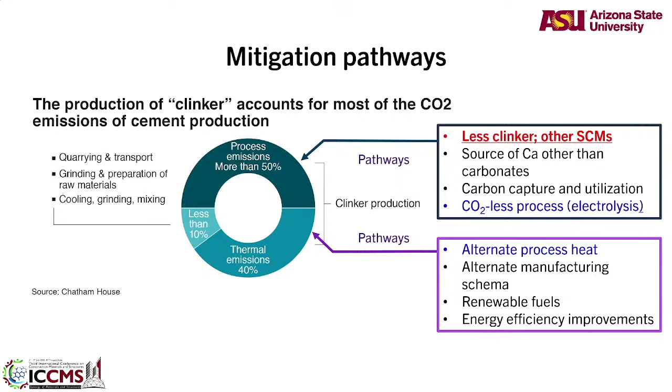The other option is to find alternate process heat - don't use petroleum or fossil fuels that create CO2, use something else to heat, use solar to heat. But think about getting solar to 1200, 1400 degrees Celsius - you can't even boil your water effectively with solar, let alone try getting it to 1200, 1400 degrees. Solar is a problem. There are methodologies to overcome that, but they're going to be very expensive solutions.

So what else can it be? Natural SCMs and fillers - lots of natural SCMs are becoming common. You can dig aluminosilicates out of the earth. We'll talk a little bit about that.

There is gray clinker talk where you phase out some of the old plants and come out with pure gray clinker assets being closed out, which is happening in the US a little bit. There is very little pure OPC plants now. Everybody is moving into Portland limestone cements, PLCs, which is the precursor to limestone calcined clay cements, LC3, the natural SCMs. So lots of different movements in that scenario.

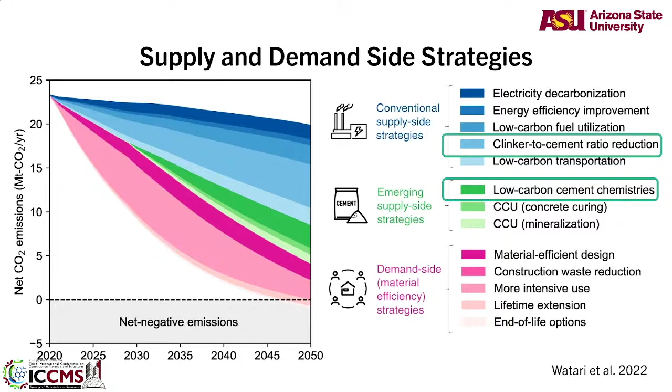And then there's a bunch of material side demand side strategies, which you heard - optimization, for example, like you saw in 3D printing just before, really a demand side strategy where you do material efficient design. You heard in the first talk on bridge design, where you can actually make it much more efficient through design strategies. Those are all demand side strategies.

If you look at materials efficiency, where is the world going to? At least when I say world, in the US we have the habit of saying world is the US, because we don't see any news other than what is happening in the US. So Portland limestone cement is what is picking up, and it's happening in most parts of the world in some fashion. Blended cements with fly ash in India, this is a great option.

Portland limestone cements, the science has been proven for quite a long time. 10-15% of limestone ground back into the cement so that you can save that 15% clinker. Great strategy. What happens is that a little amount of that limestone can react with the aluminates available to form mono-hemi-carbonates, in addition to the CSH gel that you form to give you additional properties. You save extra cement. There's a bunch of theory as to how this happens, but you don't have to worry too much about it. This can be done.

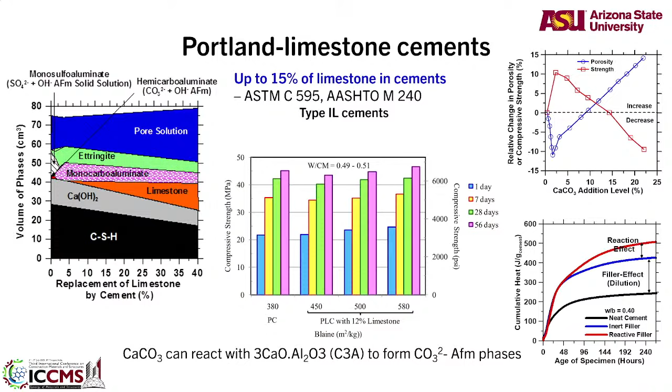So in the US, we have what is called performance-based specifications for cement. So you don't have to go and do the chemical composition matching all the time. You can do performance-based. ASTM C595 and C1157 are the two performance-based standards that you can do based on performance. What do you want? 40 megapascal strength at this time? Get it, move on, make sure that nothing else happens. So that is, and therefore these cements are now much more common.

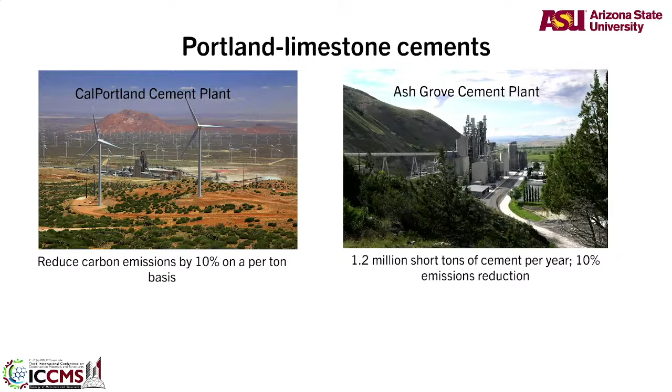So here are two cement plants, just an example. This is Cal Portland cement plant in California and Ash Grove's plant somewhere in Missouri, I think. These two plants have completely converted, two examples of plants that have completely converted into Portland limestone. They cannot make normal OPC anymore, even if they want, without changing their processes. So about 10 to 15% of emission reductions, that translates into, if you're making 1 million tons of cement, about 100,000 tons of CO2 every year reduction.

And then if you look at the Portland Cement Association, which is now called the American Cement Association, because we are all about Make in America and Make America Great Again, we have now the American Cement Association. They are using a lot of educational items about improving Portland limestone cements and how that can be implemented.

Like I said, limestone is very good if you can make it react with some reactive aluminates. Cement has some aluminate, right? C3A - if you have ever looked at a mill certificate of cement, you will see something called tricalcium aluminate. So cement has some aluminate, which the carbonate can react with to form carboaluminates - carbonate plus aluminate. No much fancy naming there. The carboaluminates can increase your strength a little bit, increase your solid formation, solid products, increase your strength.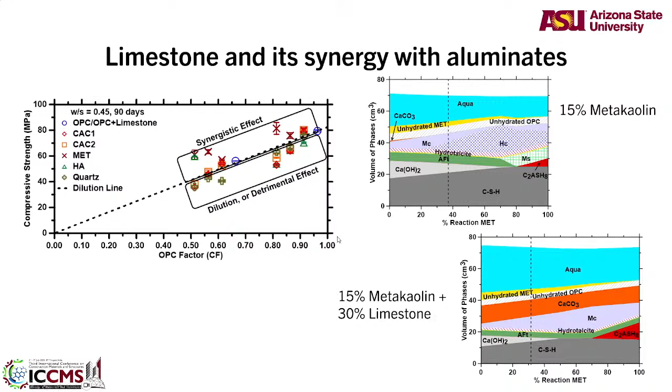And you will see lots of monocarbonate formation. Hemicarbonates are converted to monocarbonates as well, so you get system stability that way. And if you look at it here, you have pretty much reduced 50% of your clinker. So that is a massive reduction in terms of cement.

Again, this also talks about availability. Like I said, in the US, fly ash is not available much. This is the scenario of what we have - silica fume, very little; natural pozzolans, not much; slag and fly ash, also very little; plenty of Portland cement. But look at limestone, look at calcined clays, or I should say clays - plenty of clays available.

Now that could be slightly different in the Indian scenario because you don't want to take clays out of agricultural land and then spoil agriculture in the name of making cement. That's a bad strategy, right? But if you have low grade clays, if you have waste materials that are aluminosilicates, definitely that can be used.

In the US, lots of farmers get money not to cultivate, just leave their plot empty, so the government gives them money so that you don't have to ask for further subsidies. So there is plenty of land available and there's plenty of clay available to mine, which companies are efficiently utilizing now, right?

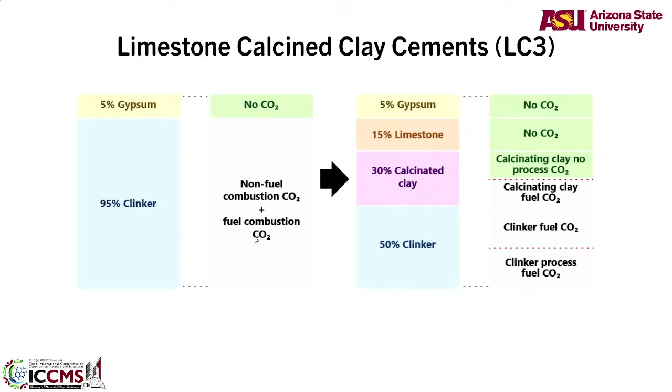So this is your typical Portland cement, and this is your calcined clay. So when you get to here, you have no CO2 from gypsum, no CO2 from limestone, a little bit of CO2 from calcining the clay, but you save a lot of clinker. So you save all of these, and there's lots of CO2 saved as compared to OPC. That's the idea, that's the strategy.

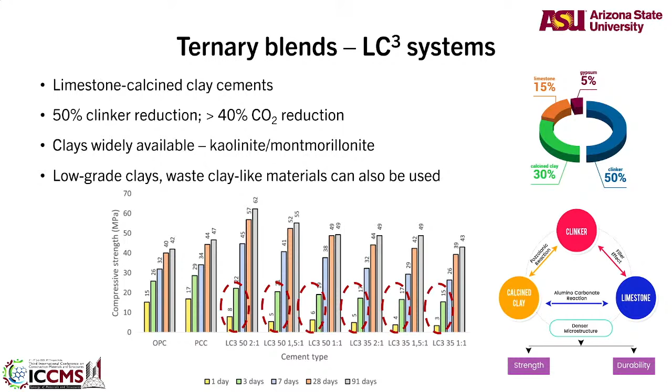So with ternary blends, LC3 systems, one of the biggest problems with such cements is very low early age strength - 1 day, 3 days, you get very low strengths if you don't play around with it. So the strategy we are looking at, some of the new stuff we're looking at, is how do we do it? Can we co-calcine limestone and clay? And companies are trying to do that. Can you put some limestone and clay together?

What happens is you calcine the clay completely - that's about 600 degrees Celsius. Your limestone needs to get to 900. So at 600, limestone is only a little bit calcined. When you get a little bit of calcination around the carbonate grains, you get a little bit of calcium oxide, and then you kickstart the reactions with that calcium oxide - you get very early strength. I'll show you the reactivity curves. You can see here, that's your normal OPC heat of hydration, reaction early on - you see what's happening.

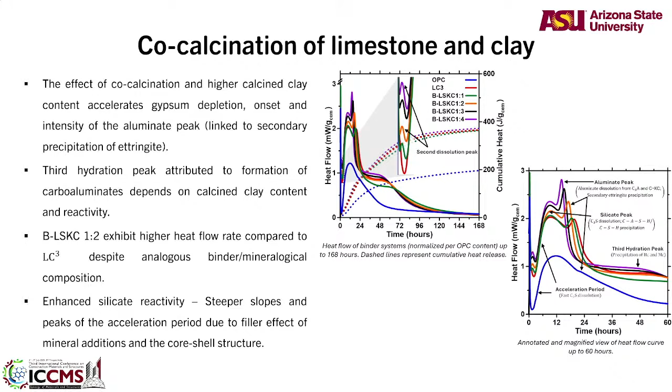That red one is LC3. LC3 still does that because of the calcined clay. But if you add a little more calcium oxide through additional calcination, you get quick peaks early on, and the aluminate and silicate peaks pick up much further. That gives you added strength. So you can now start to replace more cement, you're getting that extra strength, and you can replace more cement - up to about 70-75% of clinker can be replaced. Again, if clinker reduction is your strategy, you need that.

Now, what does that do with admixtures? Wonderful story - if you're an admixture manufacturer, you will be very happy, because it will need a lot of admixtures to do that. The other story is how do you activate clays? Clays are not normally very reactive because they have tetrahedral sheets of silica and octahedral sheets of alumina that are very happy with each other. They don't want to do anything. So how do we make them react faster?

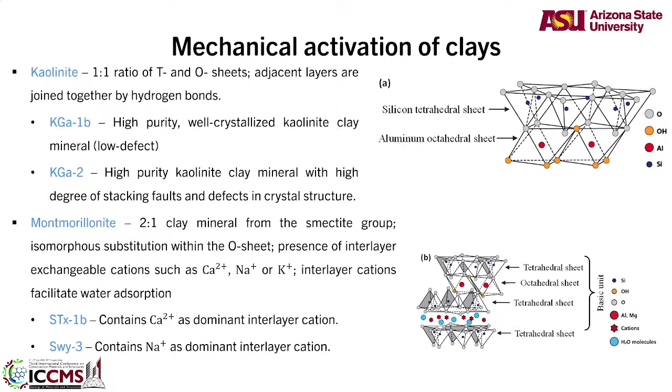You can really grind them, mechanically grind them, break them into much finer crystal structure levels and create much more reactivity. This is non-activated - I'll quickly show you what happens. You need about 600 degrees Celsius to burn them, but if I mechanically crush them, I need only about 200 degrees Celsius to burn that water off, which means I need much lower energy. This is for kaolin, that's for montmorillonite - you can get down to 50 degrees Celsius. You can just burn it off very quickly, make something very reactive by just grinding.

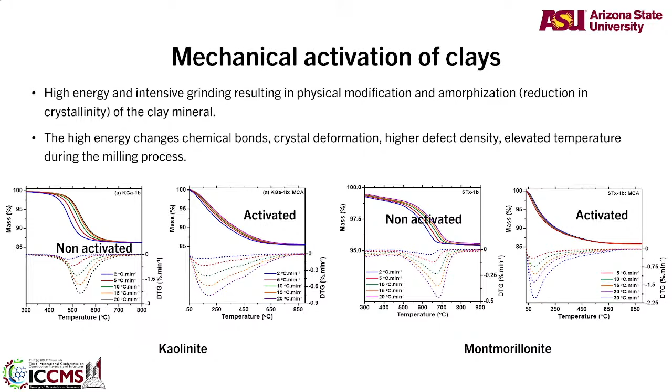So again, simple processing techniques - not simple in the sense that a manufacturer can do it fairly easily, but processing techniques to make things better. I'll skip the NMR structure, but alumina goes from 6 coordination, which doesn't do anything, to 4 coordination, which is very reactive - 4 oxygen with alumina rather than 6 oxygen with alumina.

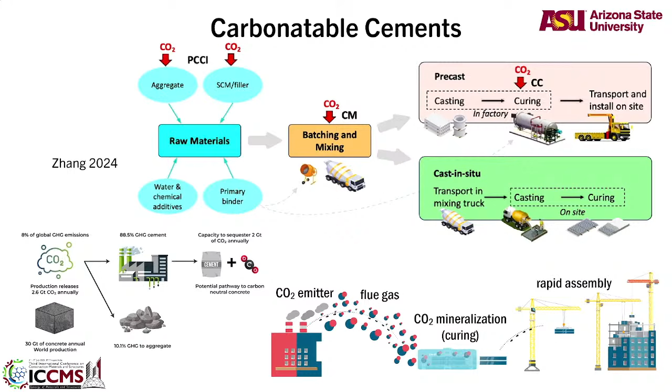But what are the other options? You can carbonate cements - make cements carbonate and absorb some CO2 that way. You can use fly ash to carbonate stuff very well. Those working with alkali activated cements will carbonate even more. Don't ask me if carbonation is a problem here - that's a totally different story. For this, carbonation is different from the carbonation in concrete that causes steel corrosion. That's a different story, but you can create carbonated products.

You can mineralize it. But I've talked quickly - Venkatesh, how much time do I have? Five minutes? You have about five minutes. Very nice, that's what I planned.

So quickly, some low carbon alternate manufacturing methods. If all of these clinker reduction strategies are great, can cement companies think about reimagining manufacturing of cement? That's some of the things we're working on now. Can we completely reimagine cement manufacturing? Can we make cement differently with almost no CO2? Sounds like science fiction, right? But I'll show you a few options to do it. It still is science, for sure. Fiction, I'm not so sure - we'll see that.

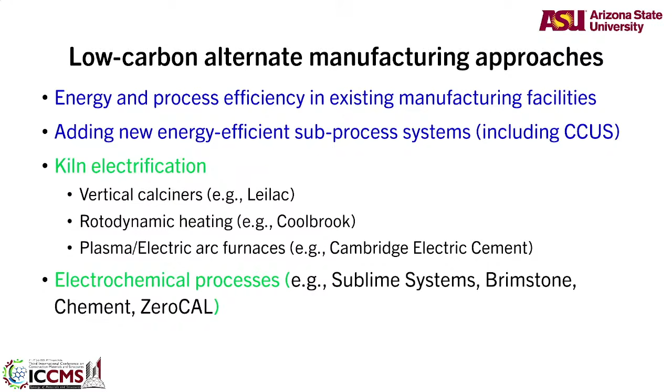So you can do electrical calcining - 1200 degrees, electricity can help you calcine. If that electricity is provided by a renewable source, that calcination becomes carbon-free. Now I'll show you a few ways you can tweak this whole process, and there's plasma as well.

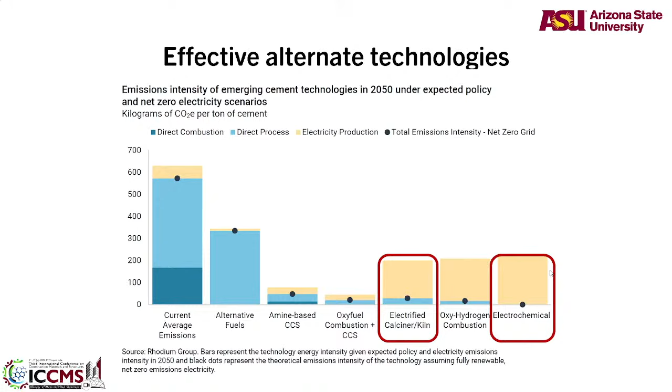And if I do an electrochemical process, I have no process emissions - I'm not even breaking calcium carbonate into CO2 at all. I'll show you quickly one slide on that. Here is one way of doing it: you have an electrically heated calciner, which means limestone is calcined by itself, not as a raw meal with everything - just limestone heated, which means you get pure CO2 that you can take off and sequester and do something else.

And then you have rotary kiln. Here you start mixing the remaining things and you create it. Your pure CO2 can be captured, right? You can integrate it with the CCUS method. You can co-locate it with a facility that needs CO2 as a raw material, like chemicals—ethylene, acetylene, all of them need CO2. You can co-locate it, right? The CO2 gets used, your cement comes out almost CO2 free, if that's one option.

The other option is electrochemical technologies. This is a little more into fundamental science regime, where you can start breaking calcium carbonate into calcium hydroxide, essentially, not calcium oxide, into calcium hydroxide by electrochemistry, right? And this can be done in 2 or 3 different ways. You can do a high temperature electrolysis using molten salts. You can do room temperature electrolysis. You can do recycling in seawater, where you can do ion exchange. There are multiple ways of doing it.

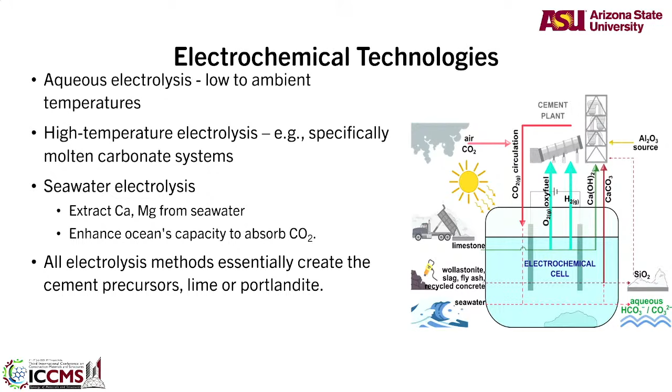But all electrolysis methods essentially create only calcium hydroxide. With that, you have to fuse silica and alumina. You need something else, and that something else typically is either a plasma or some other renewable technology, which I'm not talking about now just for lack of time.

So the idea is, if you're looking at all cement reduction technologies, yes, clinker reduction is great. You should still do clinker reduction, you should stress the clinker reduction as much as possible. But if our infrastructure growth goes like that, there will come a time where clinker reduction also will fall short. And what do we do at that time? Some of these new technologies are the precursors that we should look at in terms of understanding how we can completely reimagine manufacturing of cement.

The advantage is that this chemistry and this process allows you to manufacture many things together. And cement doesn't have to be this 500-acre plant with another 10,000 acres of limestone mine. You can actually make it much more portable, because you don't really need this 50-meter, 100-meter long kiln. You can actually shorten this process completely. Capital expenses, don't ask me at all, because I don't know, right? There'll be extreme capital expenses involved, but at some point of time, if environment trumps economics of this, there might be a time that you can use it.

In the US, we are actually starting some of these pilot plant works, electrochemical pilot plants. A company called Sublime Systems, if you can look at it, they are actually doing this. They are creating, I think, 100,000 tons of cement, or they plan to create 100,000 tons of electrochemical cement. So these are coming. These are technologies that are coming.